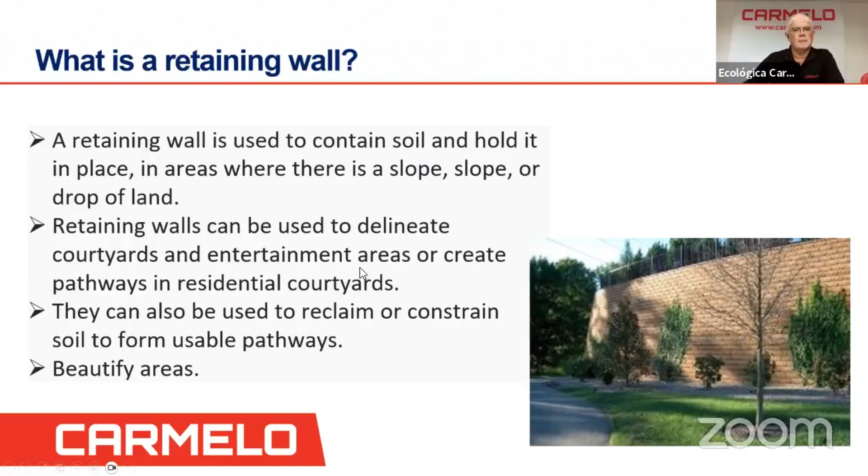So Keystone's blocks, we manufacture them in Puerto Rico, and they come in a variety of styles. They have three planes, they have straight faces, and so we can do it for retaining walls or decorative walls.

As you can see here, we also have the country manner style. You can do steps as well with the Keystone. Keystone blocks are compact, so there's several things you can do with them as well as for retaining walls.

They come in two different styles. The Keystone Standard comes in tri-plane and also straight split, so it's a straight face. And these blocks weigh about almost 100 pounds.

They're 8 inches in height and a width of about a foot and a half, so you have 1 square foot. So let's say if you have a retaining wall about 400 square feet, then you use 400 blocks of these, right?

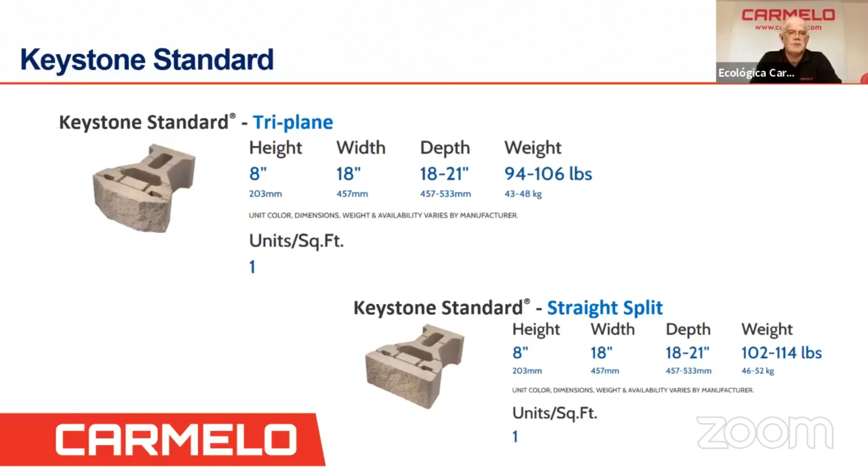So these blocks can be used for retaining walls from, let's say, 5 feet to almost 60 feet high. If you're using the compacts, you can go up to 60 feet. And if you're using the standard, you can go all the way up to 80 feet.

They're very easy to use since it's one step after the other, so there are fewer construction barriers there as well. It uses a geosynthetic that gives you the shear stresses between the units, right?

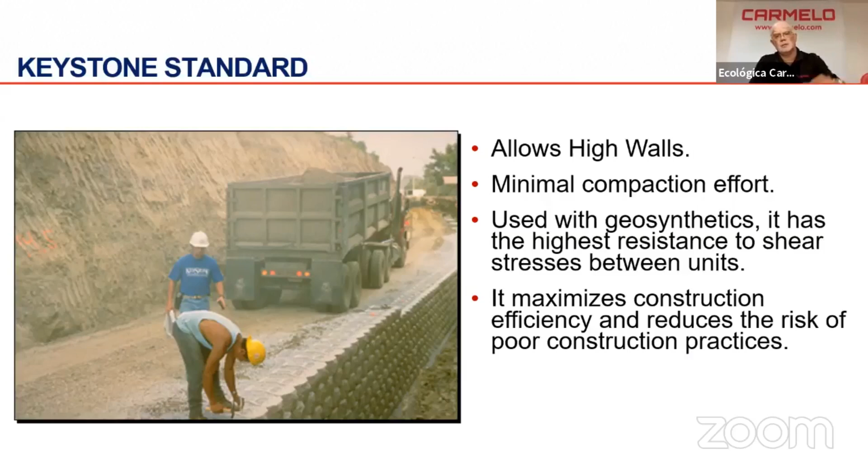And Keystone has some tables where you can select, depending on the height of that retaining wall, whether that geosynthetic is going to go every 2 blocks or every 3 blocks.

So the other type of block we have, the first one we just discussed was the standard. Now this one is the compact, which is a little bit smaller. It's 8 by 18 by a foot, with 12 inches of depth. Now the weight of this is about 76 to 81 pounds, and it also comes in 3 planes.

It has 3 sides there on that face, and also it comes in a straight split, which is all straight.

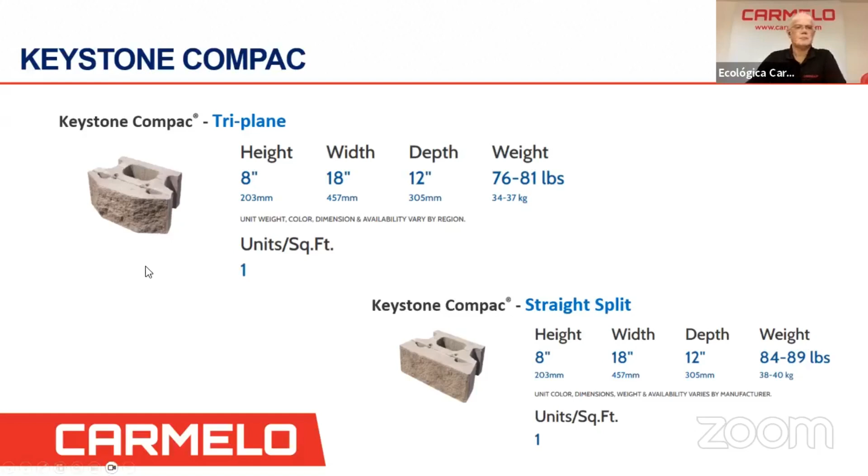So again, this is a very cost-effective construction, and it's very easy to install, starting from the base. The compact, again, is about 78 pounds. So once you start laying it over the base, you just keep going one by one, installing these.

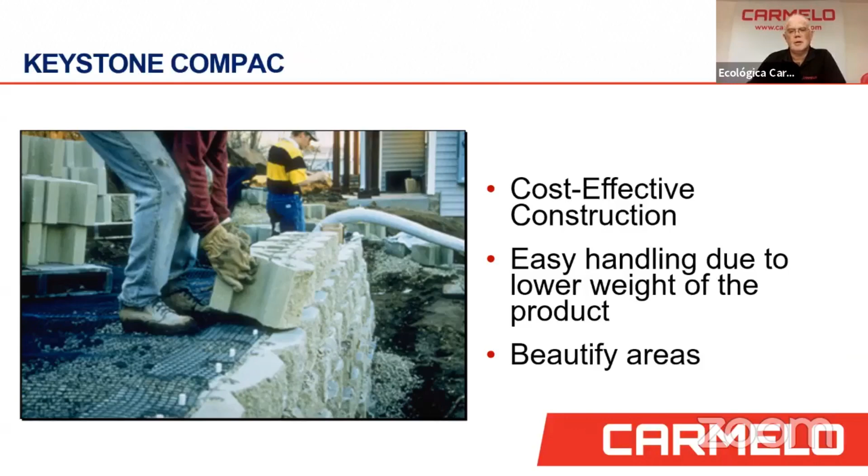And I'll explain how we do the installation of these compacts. One other element that we also use are the pins, let's say the fiberglass pins. As you can see here on that small screen, right?

They're fiberglass pins where you're going to space them out about a foot apart between the blocks as you lay them, right? And these are going to hold the mesh. It's a mesh where I'll explain in a minute how we place it. So that's what's going to help you with the shear strength of that retaining wall using this Geogrid reinforcement.

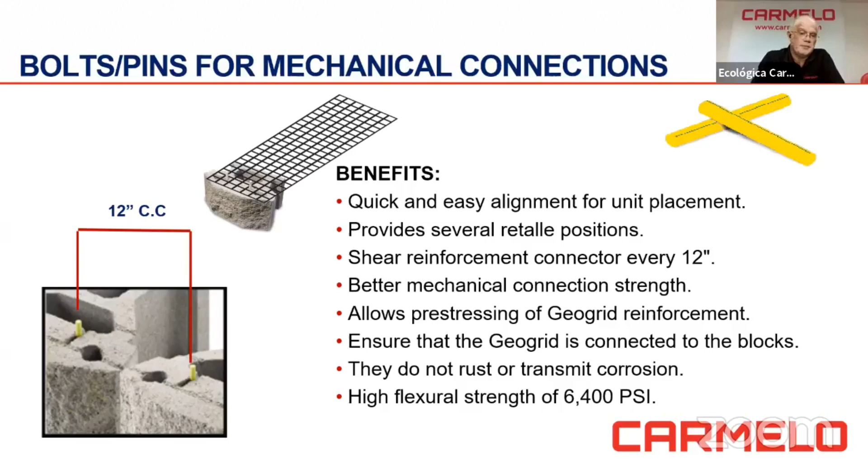So it has very high flexural strength, up to let's say 6,400 psi. So the first thing we use is the stone. It's a 3/4 inch stone, and this is used to help in the drainage.

Usually we fill in all the holes of the block and the gaps between these blocks. And also you're going to be putting a foot of this 3/4 inch stone behind the blocks as well, helping the drainage of water and creating less pressure from that backfill. It increases the resistance of the connection, and it does not require mechanical compaction. Once you lay that aggregate over, you just keep laying it one over the other.

Let me go back here.

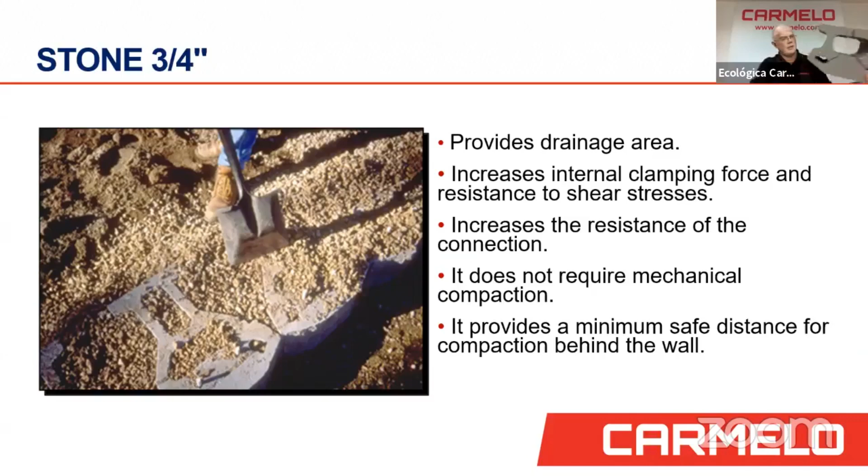The main thing is that you put those pins in before you place the aggregate, so the holes don't fill with aggregate. You want to make sure that if that unit comes in without any holes, like you can see here on the one I'm holding, you try to hammer them down in the area where it's marked, since sometimes they get filled in at the plant, but the holes are there.

So how do we install the Geogrid? The Geogrid has a seam, you can see here it has a seam. The strings that are thicker are going to go perpendicular to the face of that block. So this is the face of the block.

The stronger side of those strings are going to go in from where the pins are all the way back. They can be 5 foot, 6 foot, 7 foot, 9 foot, all depending on the design required. If you have a retaining wall over, let's say, 6, 7, 8, 10 feet, you need a design by a structural engineer.

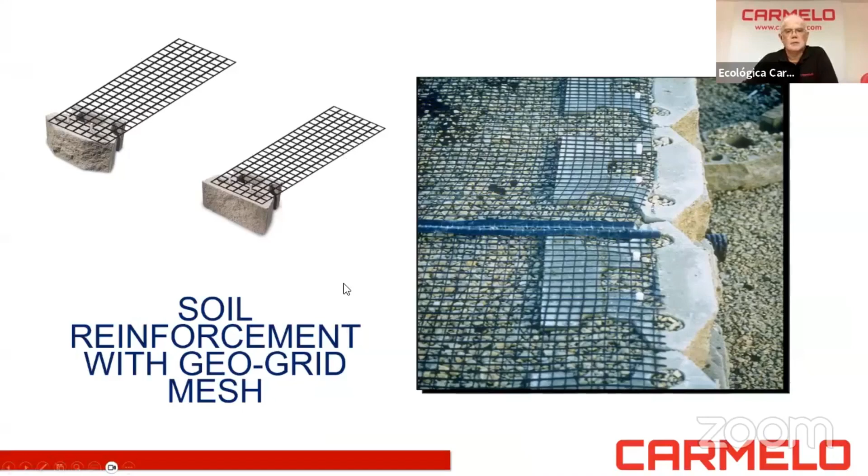And he will have a drawing of how he wants these keystones to be placed. There's a difference between some of the blocks that are made out there and the ones made by Keystone with the pins.

Walls with anchors and mechanical connection bolts are recommended for all walls greater than 3 feet high. You can go with a compact up to 60 feet. The great thing about using these pins is you have this connection, and also the mesh will be creating a mechanical connection every time.

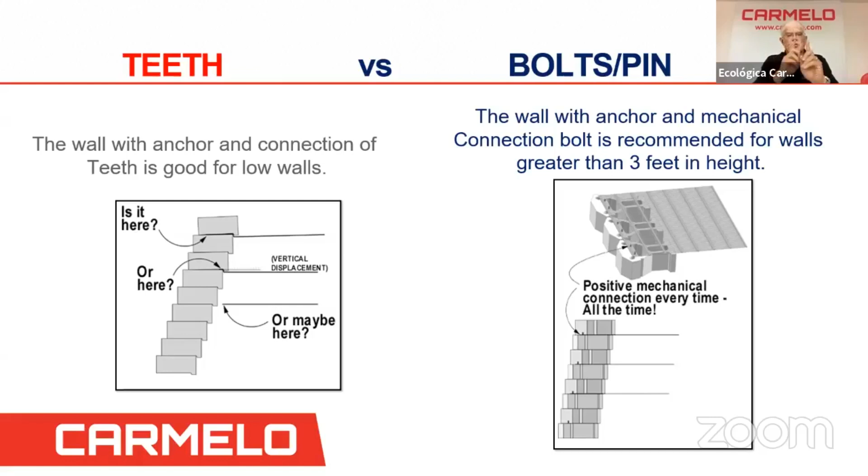If you use some of the blocks out there, they're called gravity blocks. The problem with those is they have teeth at the end, and if there's movement, those blocks can move because there's no interlocking like when using pins.

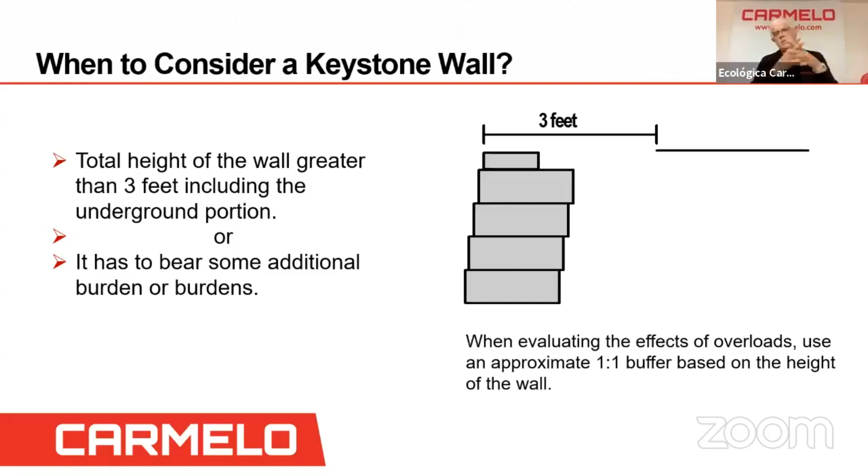Usually these blocks, the Keystone compact and standard, are used for retaining walls over 3 feet. We make garden walls which are up to 30 inches, smaller units. Sometimes customers want to use the big compact around a garden as well - you can use them, but there are also garden wall blocks for that. Again, if it's over 3 feet up to 60 feet, you can use the compact for that retaining wall.

So some design information - this is how the retaining wall is going to look. We start at the bottom with the leveling pad. This can be crushed stone with soil, and you compact that with a cylinder.

You want that very leveled on the bottom, or you can also use a 6-inch concrete pad - it doesn't have to be reinforced. Minimum, let's say, 2 feet or 3 feet, depending on the design of that, how the engineer wants it.

One other thing - you have to have at least 2 blocks of the Keystone underneath the finished grade, you can see on the bottom. So you have to count the 16 inches that's going to be part of your retaining wall. And then let's say you have 10 feet high, so this would be 11.3 feet total of height.

If you have over the surface 10 feet, these blocks can be either recessed an inch, depends, or you can go to a straight line. They can be vertically installed in a straight line instead of doing it recessed.

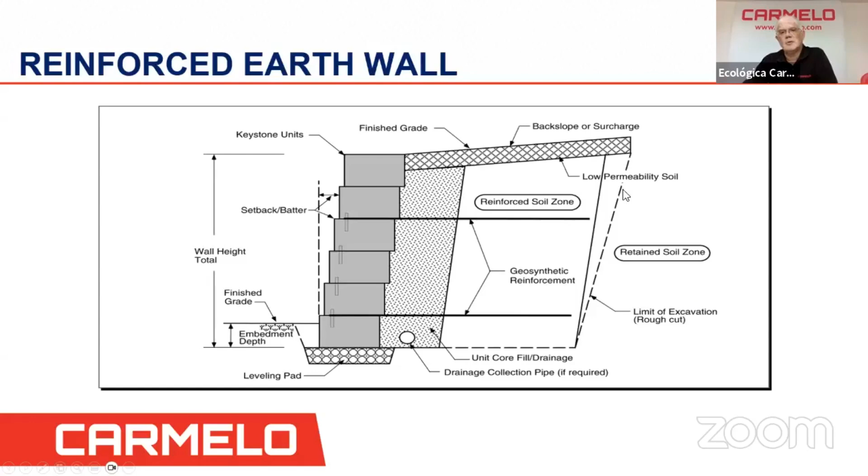So there's 2 types of walls and situations. One is where you want to fill the wall - you have your land there and you want to gain some land on top, so you're filling or adding soil in that area, and then you put your retaining wall there with the meshes.

Then the other side would be if you want to gain terrain on the bottom. Here you have the existing grade, you would cut into the land and put your keystone blocks. So now you're on the bottom, you're going to have more space.

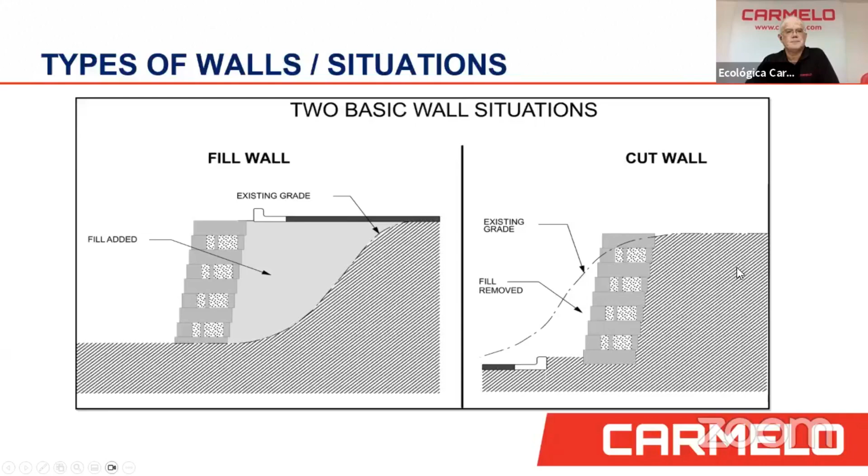There's several types of soil. The first one is like a sand gravel, so the soil particle grains are visible. There's only a small fraction of clay or silt. It drains freely, so water does not soak in but filters through. If you try to make a roll on your hand, particles are kept separate. That's how you determine if it's sand. If not, you need a professional to visit and tell you what type of soil you have.

The second type of soil is sand lime, and it has a friction of 30 degrees. It's the material in transition between gravels and clay, and it's difficult to detect for these reasons. In general it looks like a very fine grain sand. It still retains granular qualities but also retains some water, so the water drains very slowly.

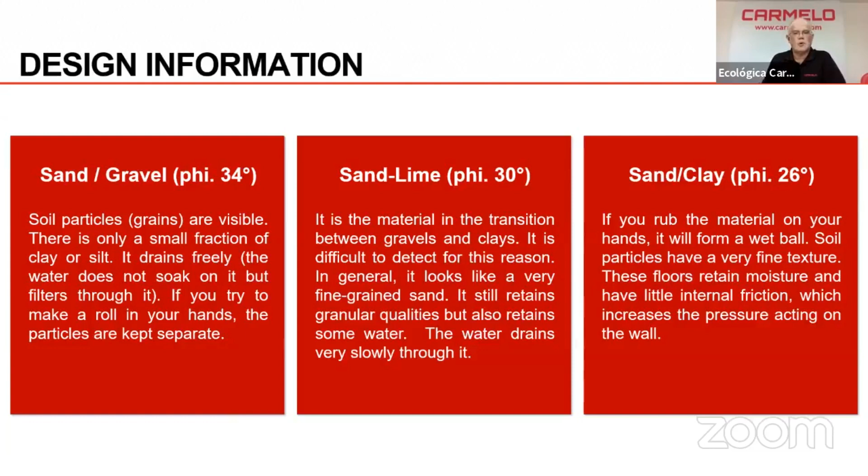Finally we have sand and clays, which has a friction of about 26 degrees. If you rub the material on your hand, it will form a wet ball. Soil particles have a very fine texture. These soils retain moisture and have little internal friction, which increases the pressure acting on the wall. So again, you have to determine what type of soil you have to determine what type of design you need to make the retaining wall with the keystone blocks.

Here's one of the tables that Keystone provides. We have a manual that you can either get by going to Keystone's site and downloading it, or you can send us an email at info@carmelo.com and we'll send you the manual.

They provide you with certain designs here for construction of these walls, let's say from 4 feet to 11 feet.

Depending on the soil you have, let's say it's a silt, you have 26 degrees, and let's say your wall is about 7 foot. Here they tell you that every first two blocks you have to put a geosynthetic mesh, let's say 6 feet behind that wall. Then the next three blocks you're gonna be putting your geosynthetic, then the other three. So this is how the table works here.

The first case here does not have any surcharge, any load on top. So let's say you're putting a structure on top here and it has 250 pounds of surcharge per square foot. Then you come down to case two, and you see here that when it's let's say 7 foot and over, you're really going to need an engineer to design these walls. That's very important.

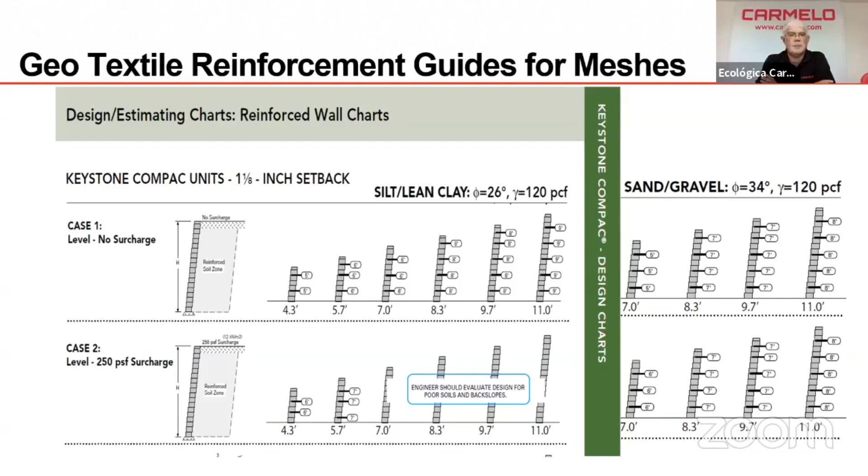For those engineers out there, Keystone has a program you can download from their website, and it only costs $10. With that program you can design, and they also have some videos where you can get training on how to use that program as well.

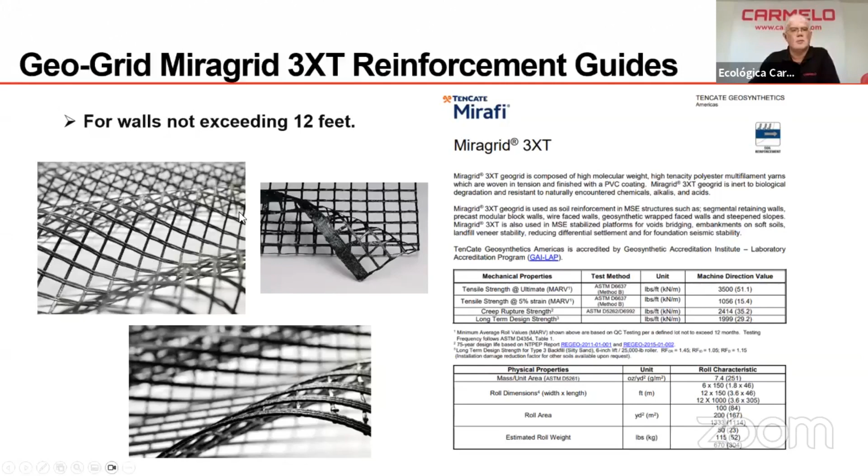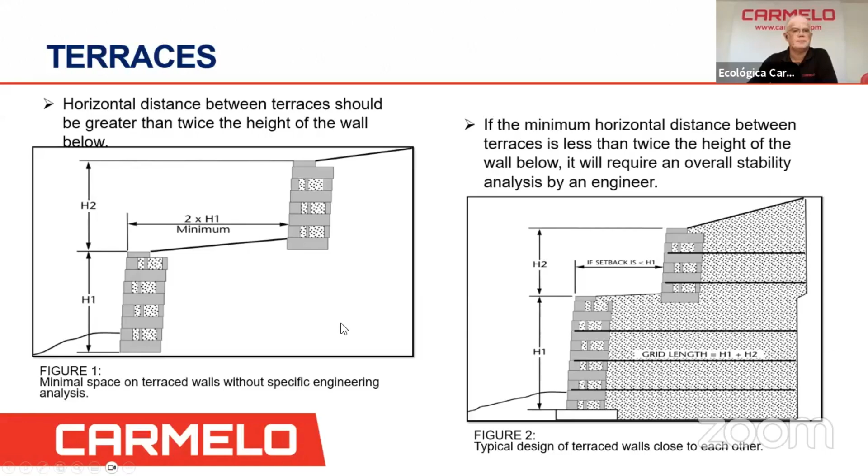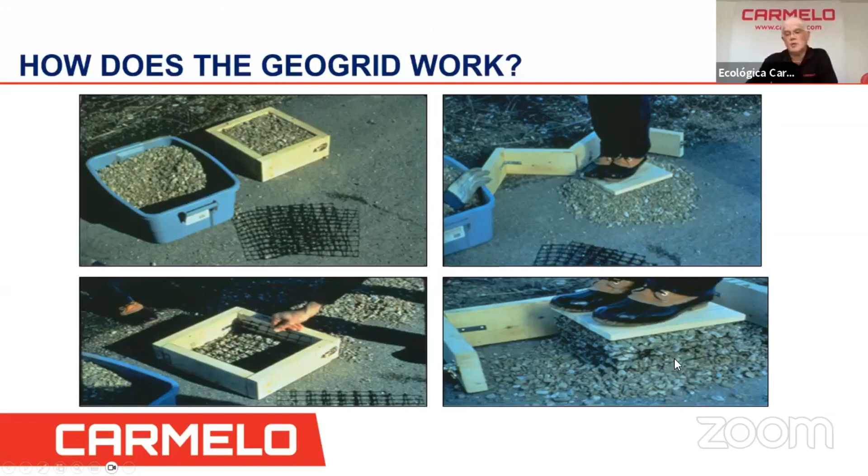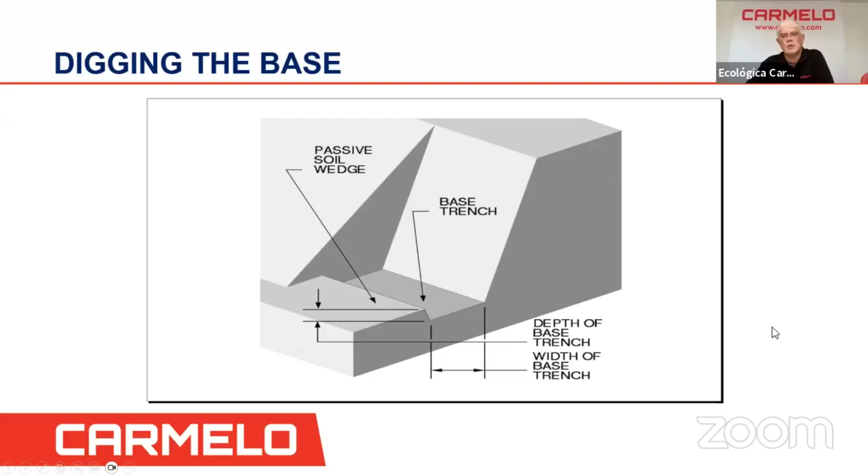So how do we install the Keystone blocks? First, we excavate the base trench, and have a finished soil surface. You'll have a width for that base, and a depth where the first two blocks have to be underground, then at the surface you start your wall. Here's a section where you have a hill, and you're putting your blocks in steps with the base.

This would be your base, and you can do it in steps, then install your blocks. You have to make sure they interconnect with each other, halfway in those steps. Some contractors find it easier to do the base with compacted soil and aggregate instead of concrete, but you can also do a 6-inch concrete base for those steps, to maintain the horizontal on the blocks.

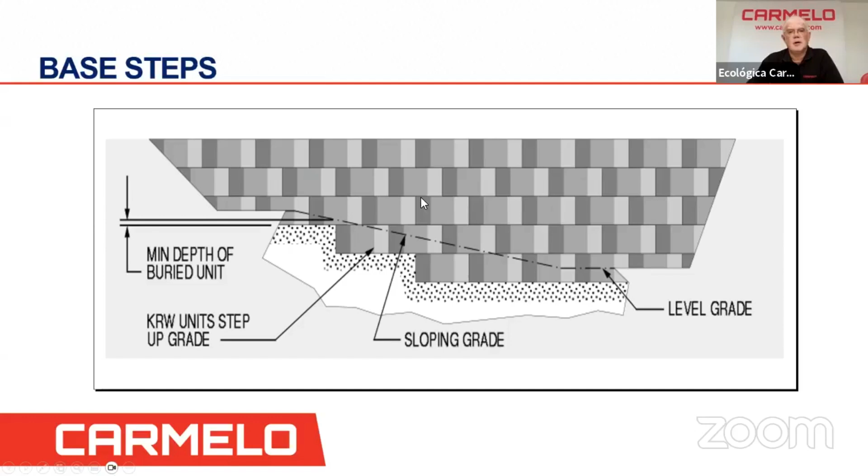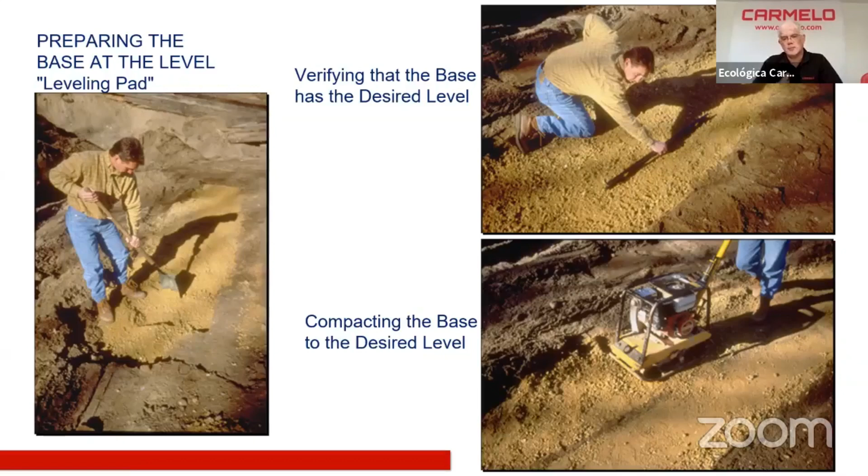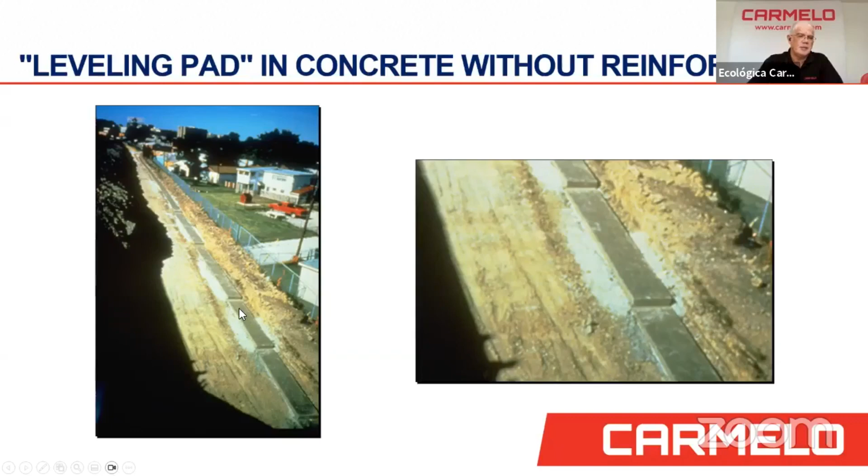Here on the left, they're distributing the leveling pad. On the right, he's using a level to make sure the base is leveled before putting any blocks, and also compacted. Here's a leveling pad with concrete, without reinforcement. This is the slope going up, and you can see how they built the concrete pads in steps here.

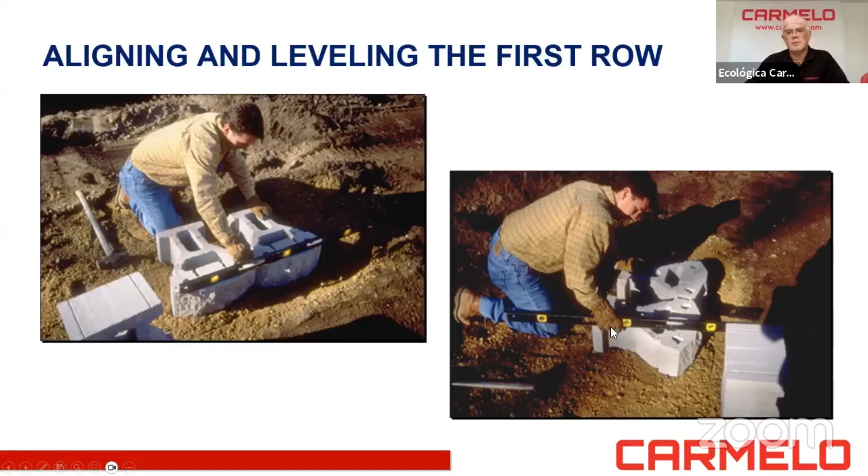So once you have your base leveled, you install your blocks. These are the standards, and you put your level in between the two blocks. Make sure that's leveled, and also perpendicular to the face as well. You want that really leveled before you do anything.

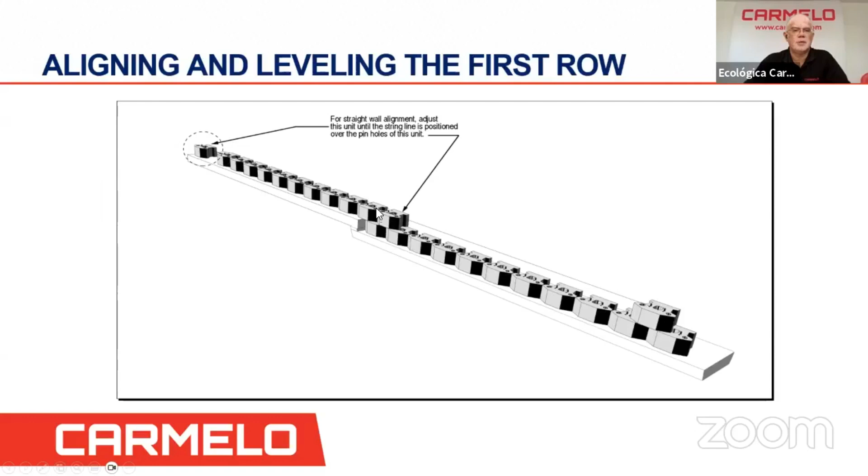Whenever working with hills, you have to start with at least two blocks from your next steps, like you see here. After you level the block, you put in your pins, pushing them into those holes. They should already be spaced out like a foot, since that comes from the factory.

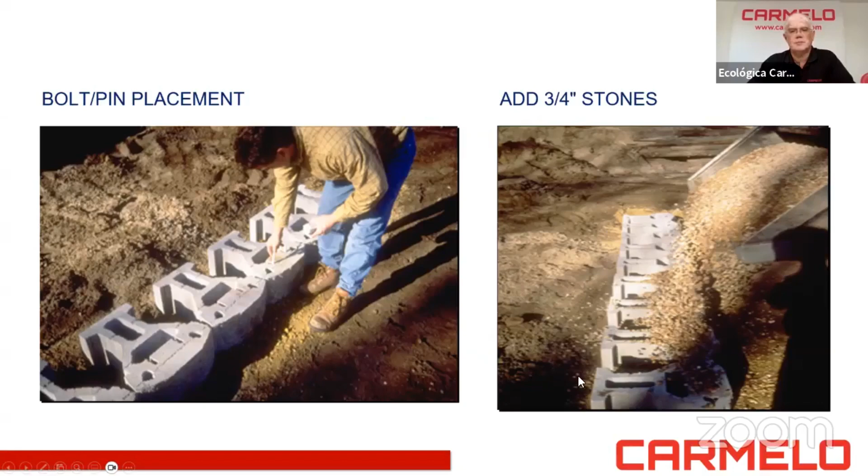Then you pour the 3/4 inch stone over the blocks, filling all those cavities, and you'll also have a foot behind the blocks for drainage. You got to make sure you put that perforated 6-inch pipe on the bottom first, and then put your 3/4 inch aggregate.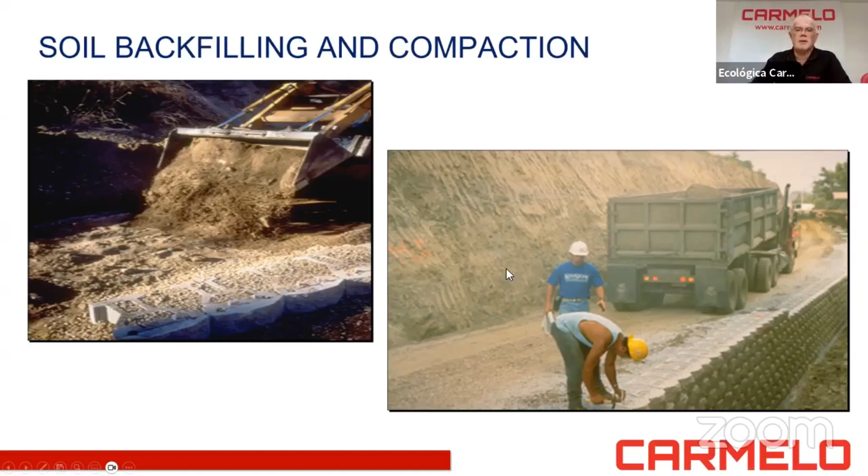Once you put your aggregate, then you put your soil backfilling, doing the first row of blocks. You fill the aggregate and the foot of aggregate behind, place the soil, then come back and compact it. Once you have your meshes there, you don't use a truck or excavator over them — the trucks used must have rubber wheels over this construction, because otherwise you'll ruin the geogrid.

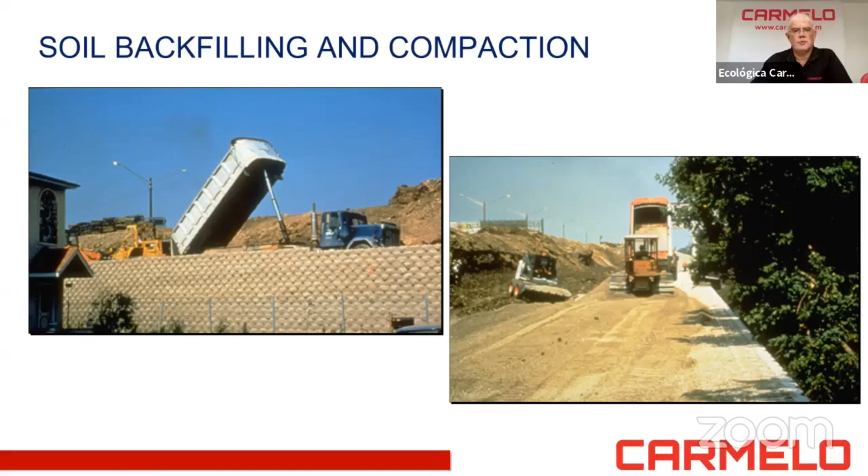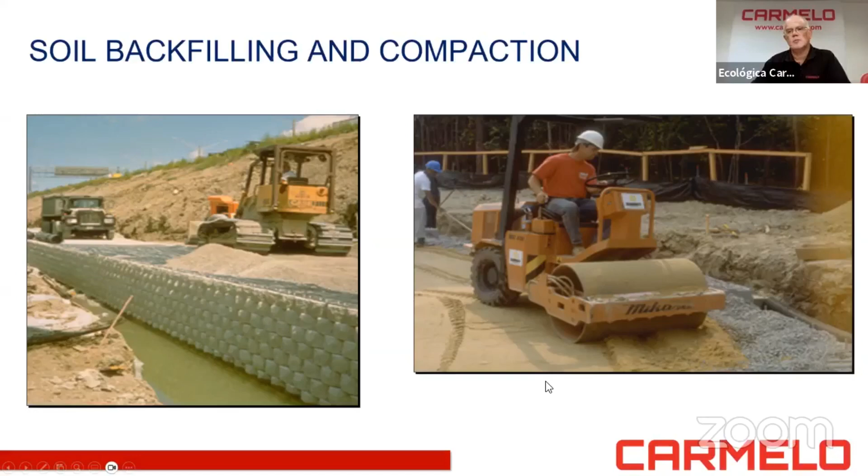You can see here they did a couple of layers already. Again, it's one step after the other: putting the block, filling it, putting the pins, putting the aggregate, then filling the soil, and compacting it with a roller or tamper. Before going to the next level of block, make sure all the aggregate over the edges of that block is taken out — sweep it out and clean that surface, or your blocks won't be leveled for the next layer.

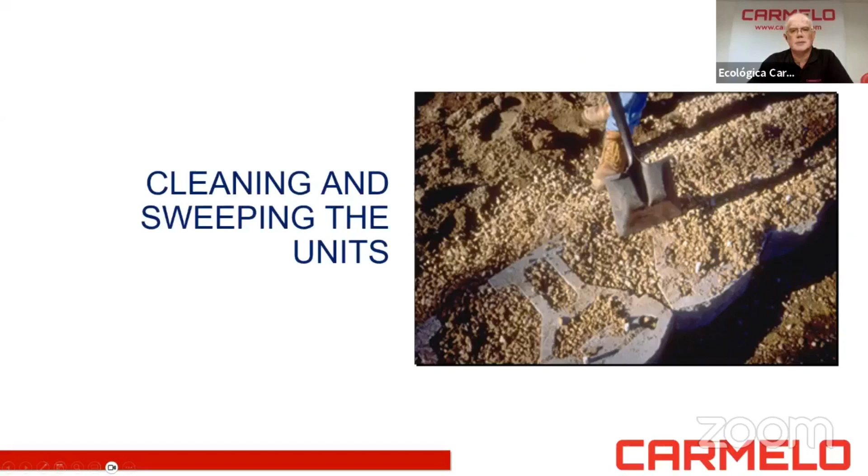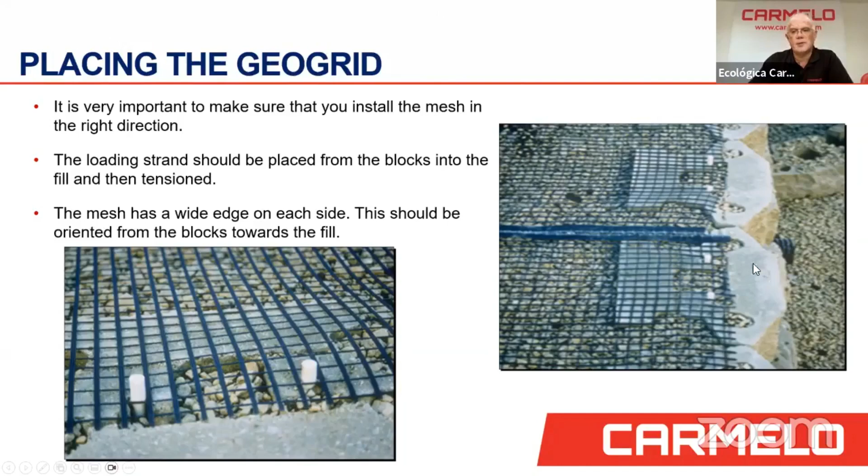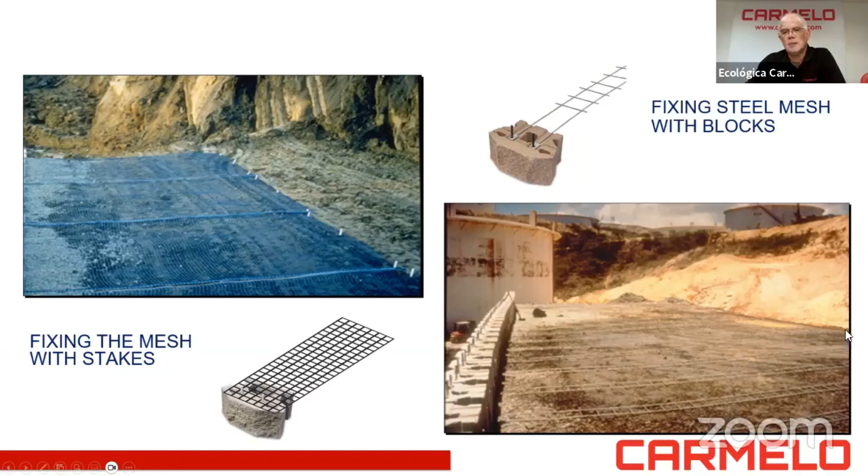Here you can see the geogrid and the two pins — see the thicker strings going down from the face of the block. You can see the seam identifying how you put that geogrid, so make sure the stronger strands are connected from the front to the back. You can also put stakes, which can be wooden, at the end to straighten out the mesh. If it's a bigger job, like a retaining wall, and they want to use steel meshes like in highways, you just lay the steel over the two pins, with no need to anchor them on the other end.

So the only equipment with wheels on the reinforcement, again, that's very important. Then you're ready to place and align the following blocks after you do that.

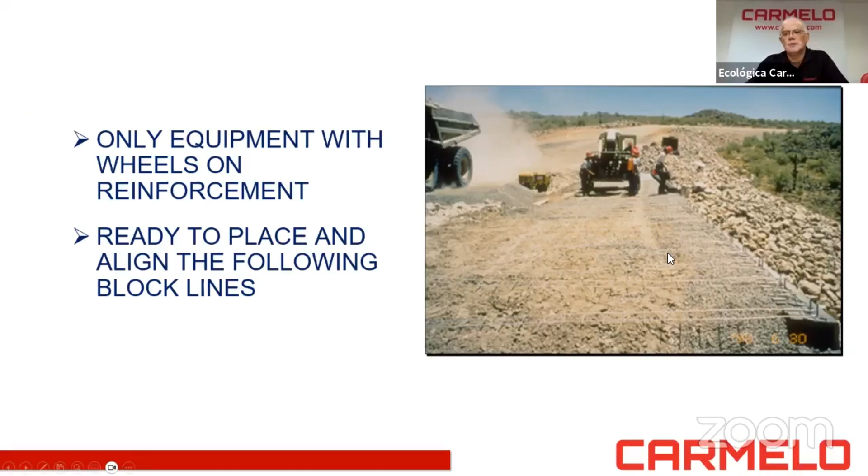You can see, there's about 78 pounds each, and they're staggered in between the lines.

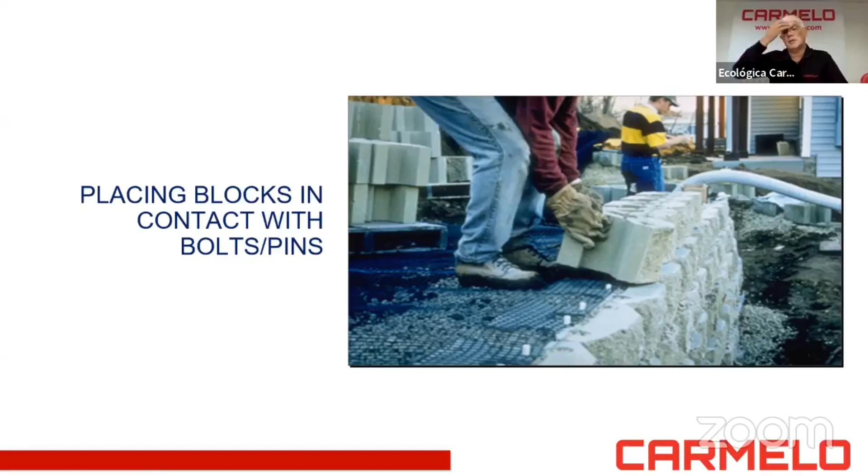So we adjust the leveling using material such as asphalt. Here, what they're saying is you can even use the mesh to make a shim. Let's say you need to level some edges of that block because if it's not horizontal, you can take that mesh and twist it and make it thicker, or fold it 4 times like that.

Then you can make a shim there and help you level. So you can use asphalt shingles, a piece of coiled mesh, or a vinyl slab as well. I want to make sure that you use something that doesn't rot with time.

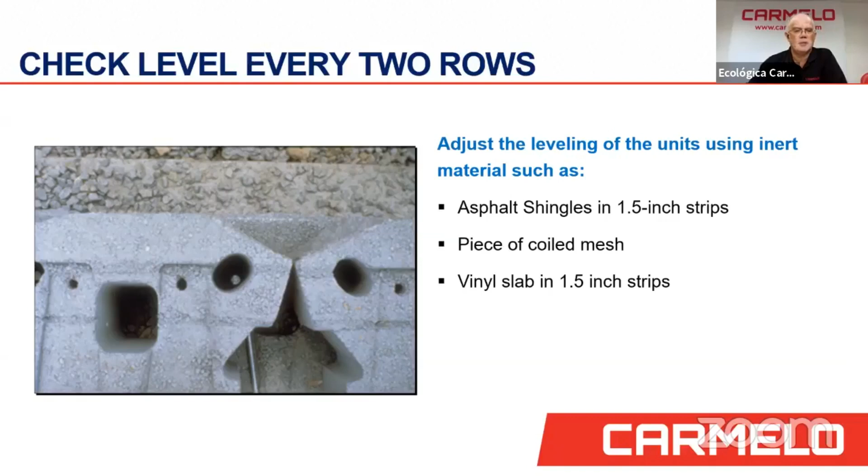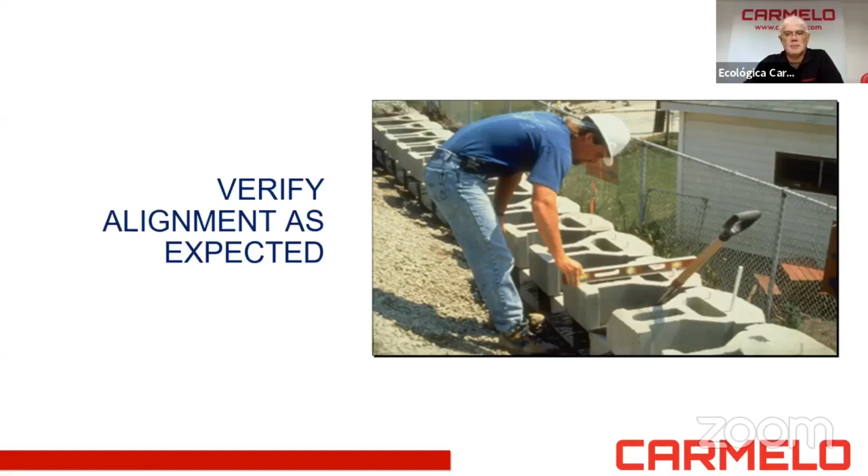You always verify the alignment of that wall as well. You can put a string on the front of this wall just to make sure we're aligned. You want to level these blocks every line. So some installation details.

Here you can see these are the standards on the left. Whenever you're putting, let's say, pipes, you can cut the block and adjust the length of those blocks, then put them one next to the other to the pipe. So you can put pipes, culverts, and things like that, and that's how you place these pipes.

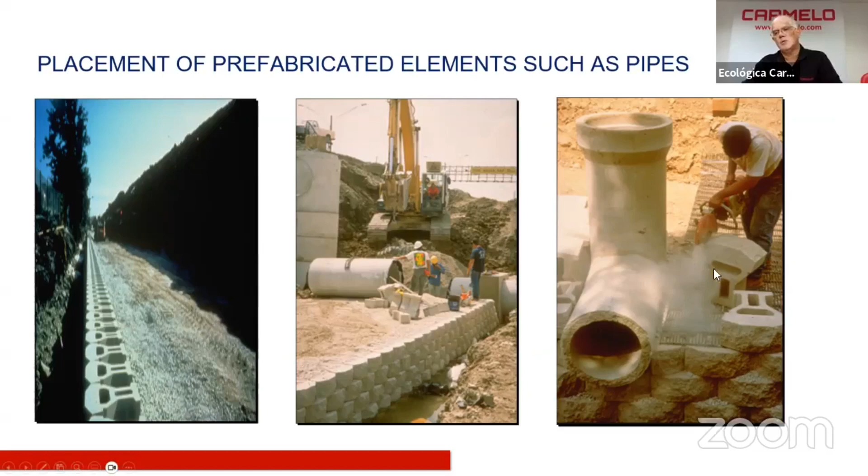We had a recent project where they wanted to install a pipe after the wall was installed, and what we recommended was to take every line out again from the top to the bottom in that area, then put the pipe. This is how you would adjust each line, just cutting the sides of those blocks.

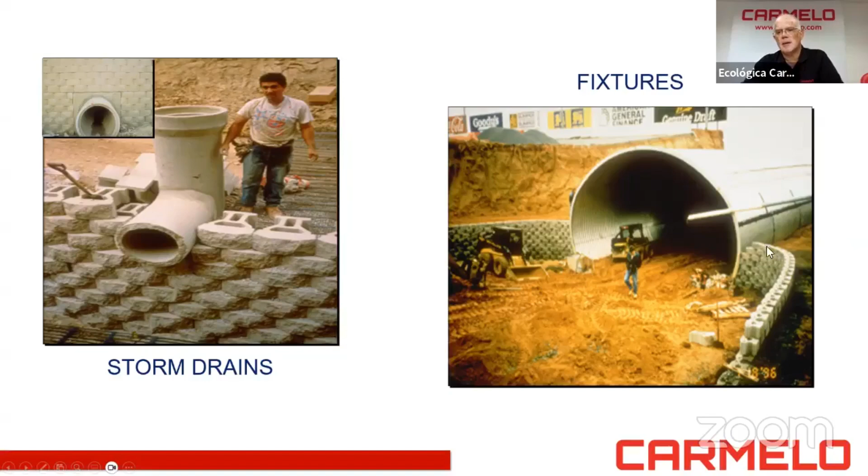Some more photos on how to install these pipes with the blocks. You can also have a gigantic pipe like this tunnel, a steel tunnel like this, and again you can put these blocks right next to whatever structures you have.

So you can do curves, let's say guardrails as well. And if you have, let's say, a 90 degree inward angle, you can do that installation. The main thing at the bottom is this would be the way you'd be connecting.

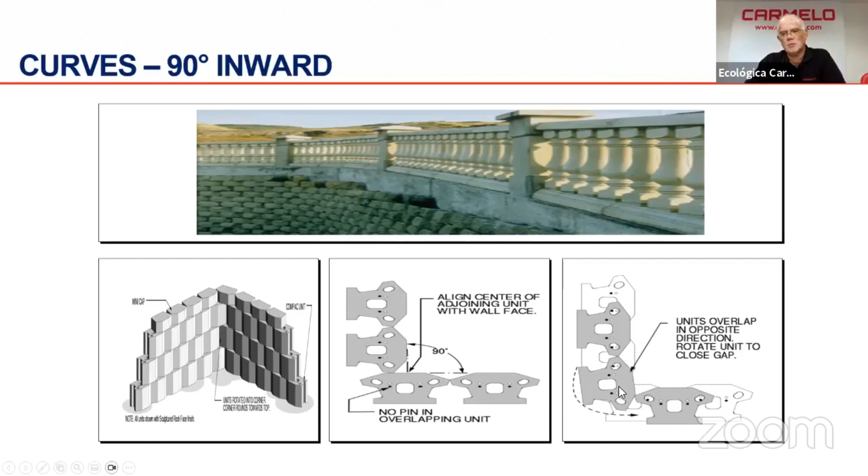Say no pin in the overlapping unit, that means you're not putting any pins here, these two on this corner. Then when you come up with the next layer, this is how you'd be installing them.

So then you have walls with changes in direction. Again, how you'd be placing one layer after another to do these 90 degree angles. In our case, we don't make, let's say for corners, square blocks. This would be you'd have to do a concrete column, or use a concrete corner block to work something like this in a corner.

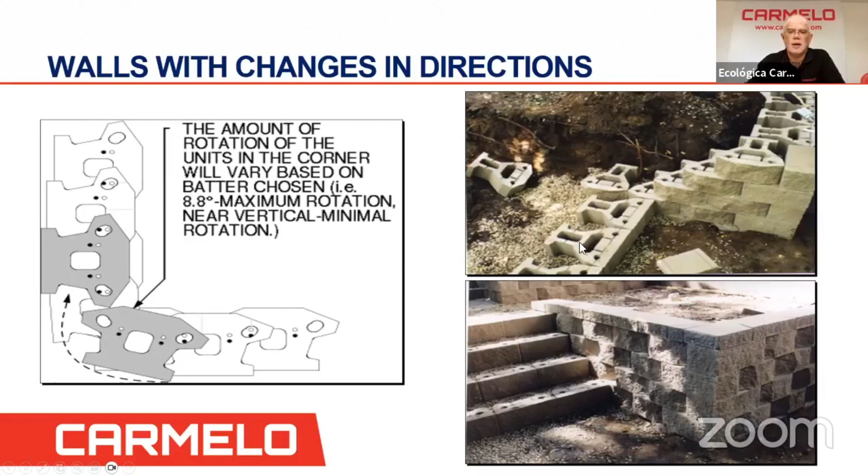But you can also use the keystone blocks to do steps. Then you can use the cap. The cap is like 4 inches high, same texture as your keystone, and that's how you hide these holes or cavities with that cap on top.

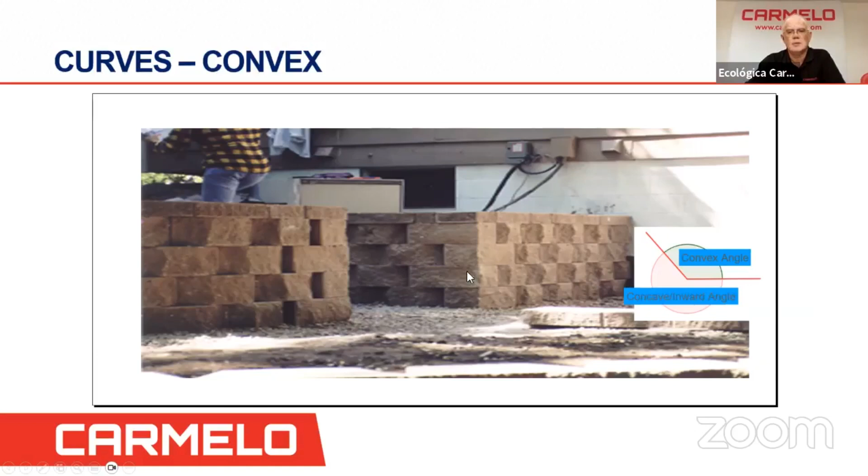You can do curves, convex as well. See here, it's convex, and this is how you lay them. Concave.

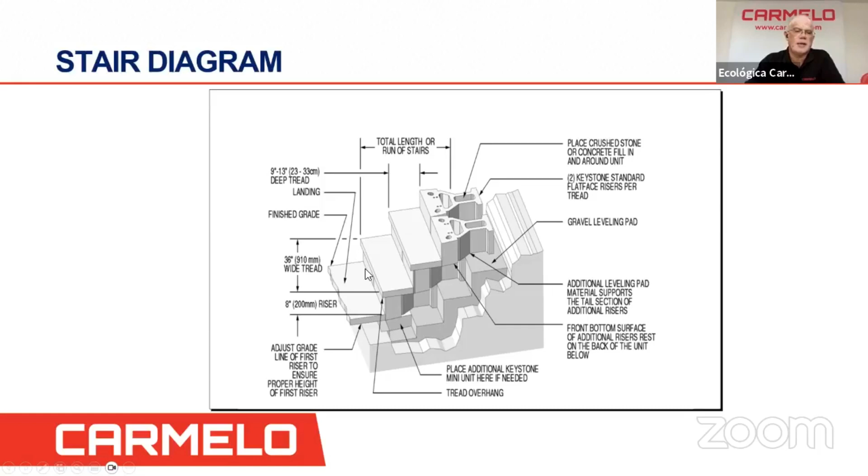And if you're doing steps, we can share these diagrams with you as well with all these details, placing additional keystones and how you can be doing these steps, and putting the cap on top is your final step there.

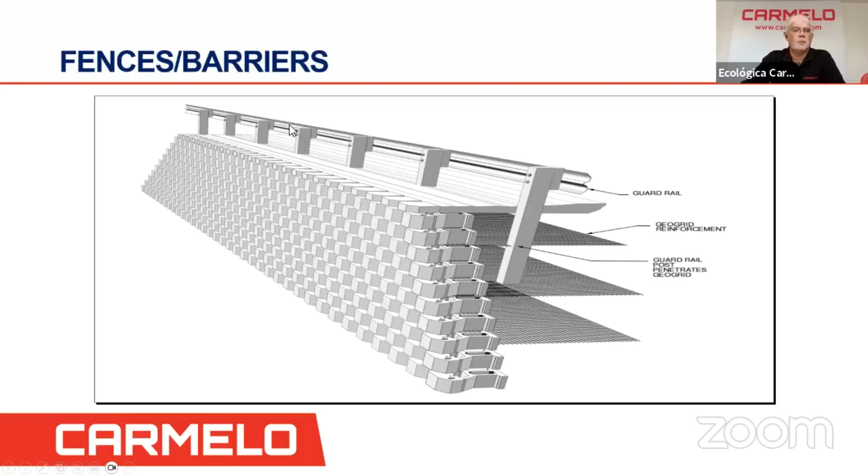You can put fences behind the retaining wall. Let's say they should be about 1.5 feet behind. These guardrails, say on the highway, or if you're putting a fence, would be like 1.5 feet behind this retaining wall.

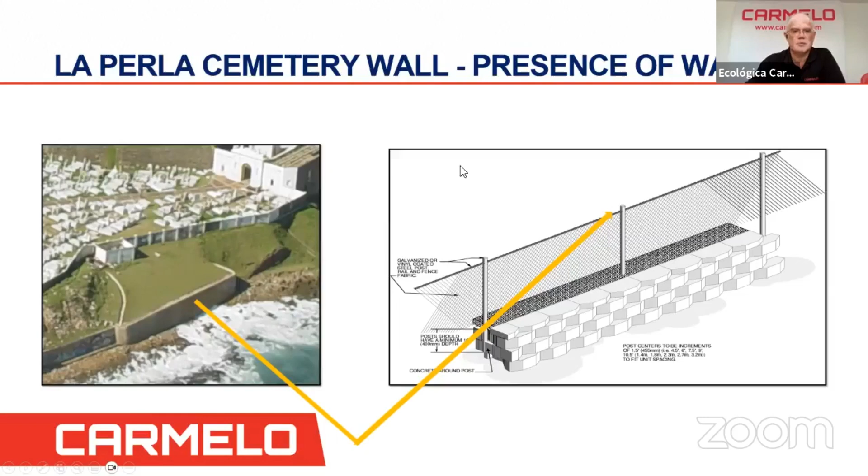You can see how they built the fence behind, let's say, the keystone wall. So there's a fence there, just to make sure, for safety hazards.

So how do we calculate how many blocks we need for a wall? We know that our keystone block is 1 square foot, 8 inches by a foot and a half, and we're going to need 2 pins per every block.